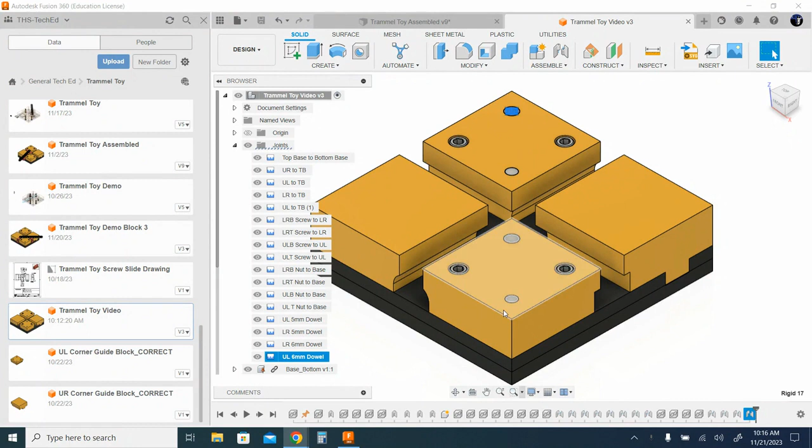So far, what we have done is we've taken parts, brought them in, and jointed them using the joint tool, where we connected the bottom base to the top base. We have done the four corners as as-built joints because when these things were designed in Fusion, they were actually designed in place, so all we had to do was an as-built joint. We have done regular joints with the four bolts and the two different dowels, the 6 millimeter and the 5 millimeter, and for the four nuts on the bottom. So at this point, all of our joints have been rigid, whether regular joints or as-built joints.

What we're now going to do is move into motion joints. As you can see, all my joints here are named, so I'm nice and happy about that.

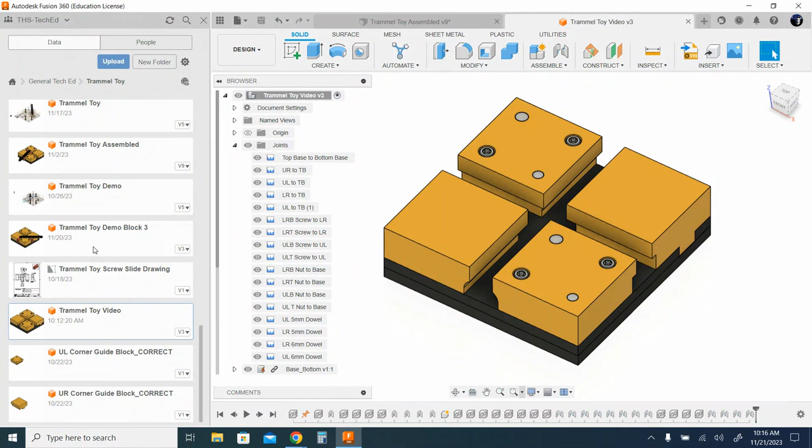Let's go ahead and bring in our pieces. I want you to bring in the pin slide block corrected, I believe that's what I named the file. So there's my pin slide block. My pin one has the rounded corners. I'm going to say okay.

I'm happy with that, and I need you to bring in the screw slide block. So I'm just going to drag that in, and you're going to want to put them on top of each other. Just go ahead and move the second one out of the way and say okay.

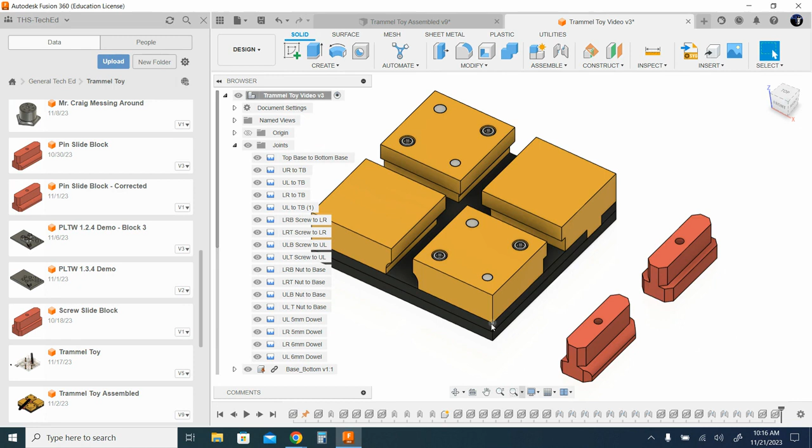The other thing I'm going to do at this point, to save myself a little bit of time later, is bring in some of the hardware, so I don't have to pause again for that. Let's minimize these joints and put our focus on hardware.

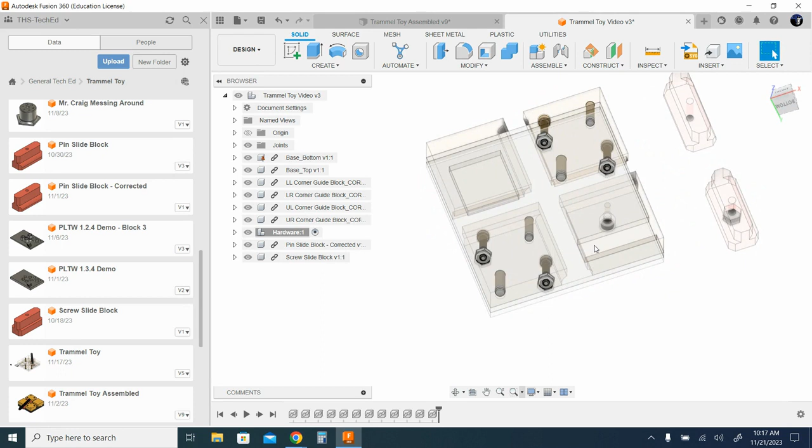I need to have another nut for the screw slide one, so I'm going to orbit around to the bottom here. Press M for move, like we did before. I'm moving a component. I'm going to get one of these nuts, create copy, and let's just move this thing out of the way. Okay, so I now have an extra nut.

Remember that we're doing the move copy as opposed to dragging a new one in, so that when we do our schedules or our list of components, we just add the number to it. We don't have a whole new line in our list with these huge lists.

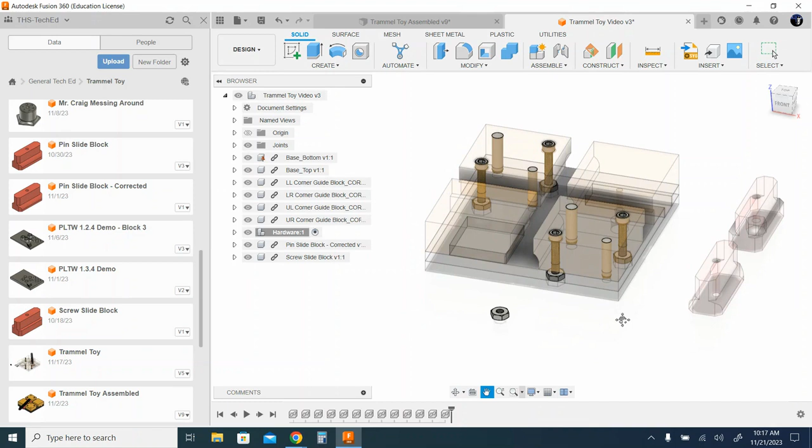So I'm going to need another one of those, another one of these bolts. I'm going to press M again for move, see if I get one of these bolts here. There we go. Create copy, let's bring this one down, and say okay.

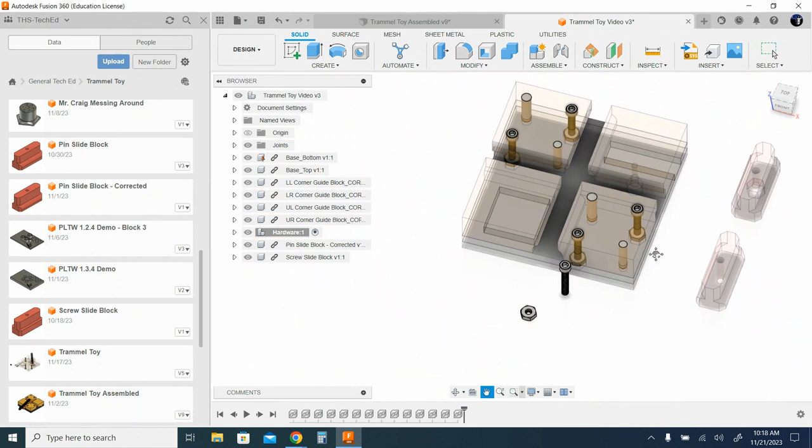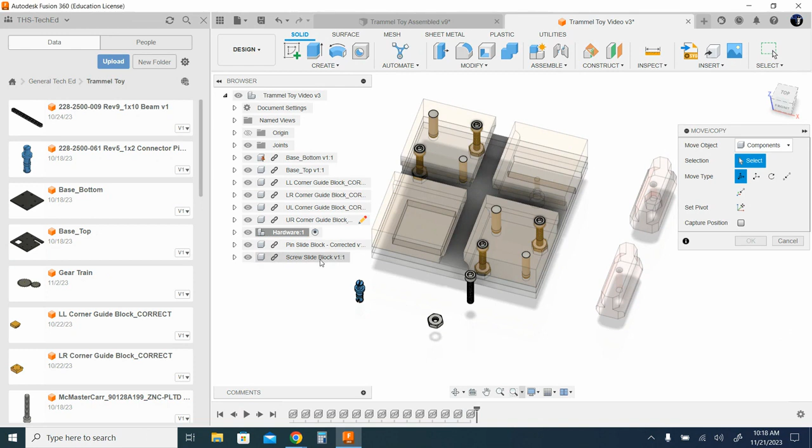I am going to need, while I'm in here, two of these little pins, these connector pins. So I'll bring the first one in and get it out of the way for a little bit here. Say okay. M for move or copy, select that component, create copy, move it out of the way. Perfect.

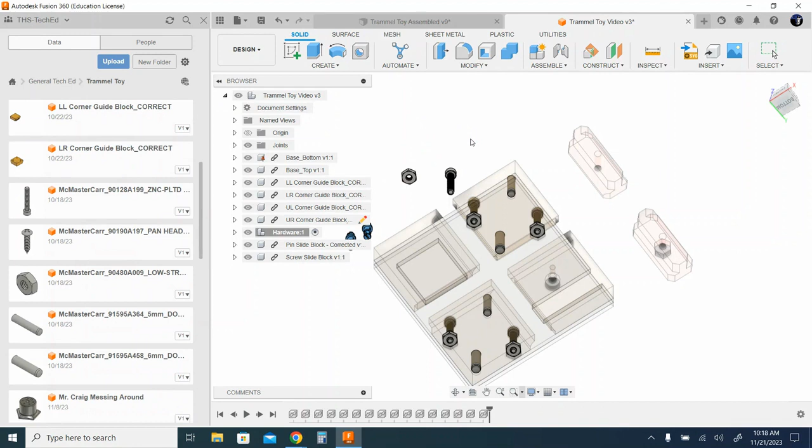And I am going to need the screw for the bottom here, that little bottom hole, so that is right here, the pan head screw. And put that off to the side, let's move it out just a little bit more. There we go. All right, so all of my hardware is in.

Let's get to finishing this assembly. I'm going to put my focus back on the Trammel toy, and I'm going to first create the joint to the screw slide slider here, because the piece is nice and out, I can see things. It'll make my life much easier.

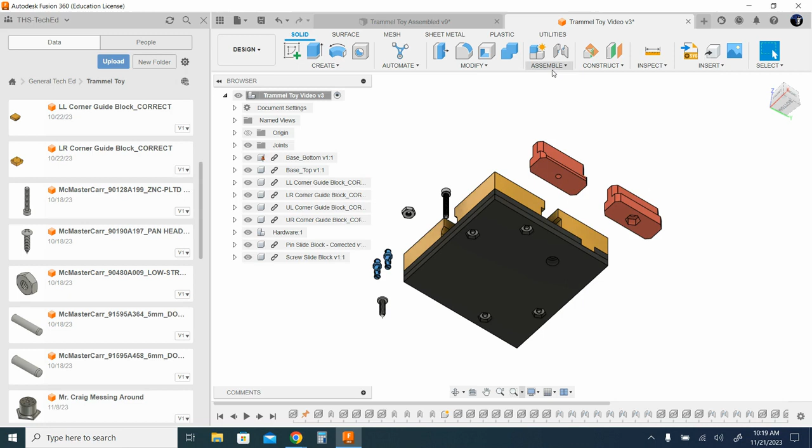So I'm going to do J for joint, or again you can come up to the ribbon, use the one that looks like a hinge, or drop down for assemble, and right there again, joint. It says joint, has the J shortcut for me. Very good. Let's go ahead and get the face of this nut.

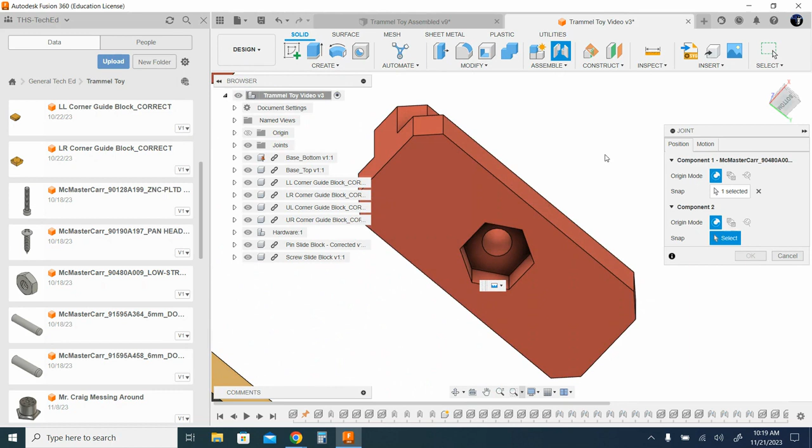Hold down Control, get that center dot. We're going to come down to the counter bore of the slider, hold down Control, get the center spot. And then we're going to twist this thing into place. That looks about right, say OK. Go name that joint. This is nut to screw slider. Very good.

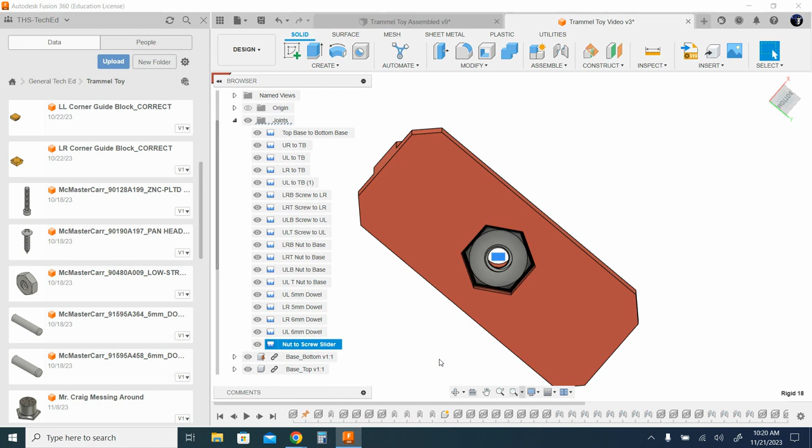All right, now let's go ahead and put these sliders in place. You're going to see that one of the sliders has rounded corners to it. That's going to fit in this spot here.

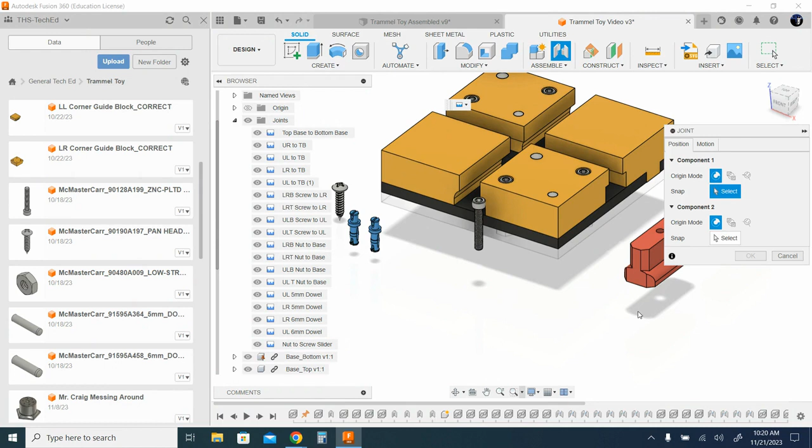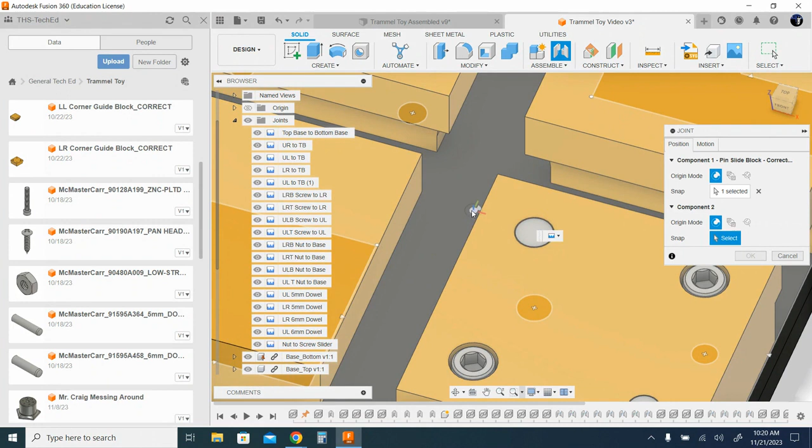So I'm going to do my J for joint just like I've done before. I'm going to get the bottom face of my pin slider, hold down Control, get to that bottom hole, and get to the top face of this plate. And I want the center of that, so hold down Control, hit that pin, or the point.

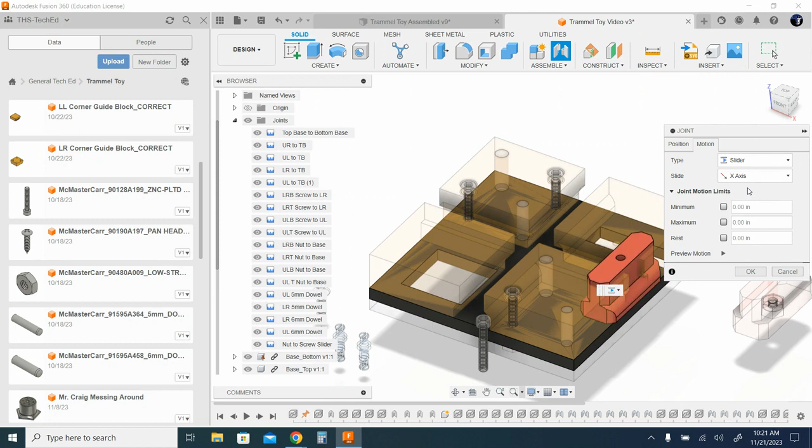We now have that rigid joint, but I want this to be a motion joint. So I'll come here to motion and change my rigid to slider. It's sliding, but right now it's going up and down, so it's on the wrong axis. Let's go through and find the axis that works. That one doesn't work because it's going through the part. Let's spin this thing. There we go, now we're sliding right through.

Do not at this point change these offsets. There's a reason for that, we'll get to it when we get to the revolute. So I'll say okay, and you'll notice if I slide this thing, it only goes the direction I'm allowing it to. I'll move that out of the way and go do my next one after I name it.

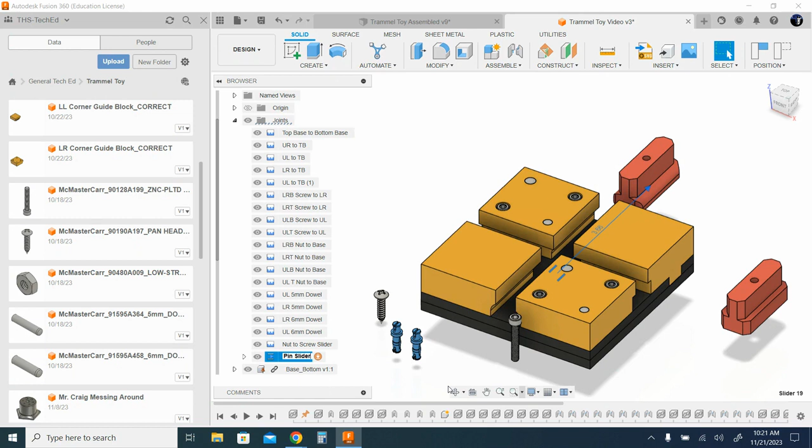Slider, this is my pin slider. Cool, happy with that. J for joint again. Let's get to the bottom of the screw slider. Get on that face, hold down Control, hit that point.

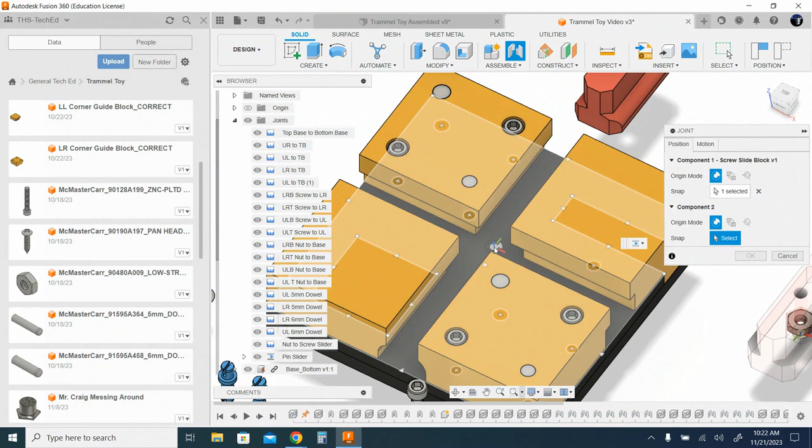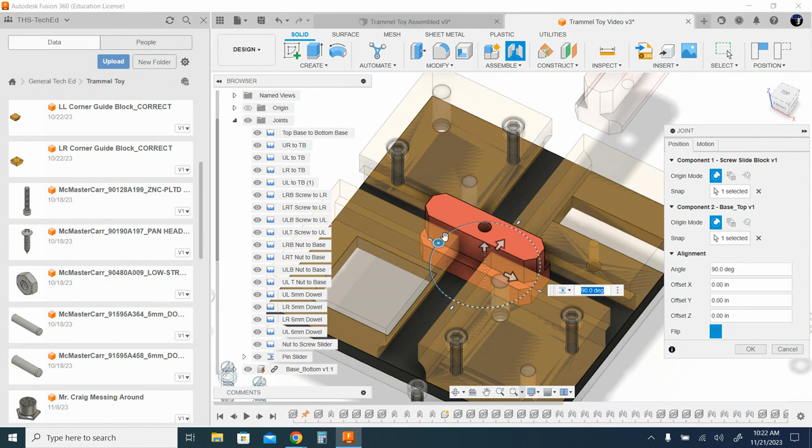Let's get to this face here. Hold down Control, hit that point. Same spot, bottom face of the screw slider to the top face of the top base. You see this thing's going the wrong direction, so I'm just going to use my revolve tool. It's sitting right there, that blue dot. Turn this thing and check my motion.

Z was not right. Let's try Y. Nope, Y is not right for me. Do X. And really, the X, Y, and Z, yours may not match mine - it really depends on the way your model is oriented. So I'll say okay, and this one's now sliding.

So I'm happy, we now have slider joints. Let's go ahead and name that. This is my screw slider joint. I'm happy with that. Bring in our beam so we can do our revolutes. Put a couple more rigid joints in and we're done.

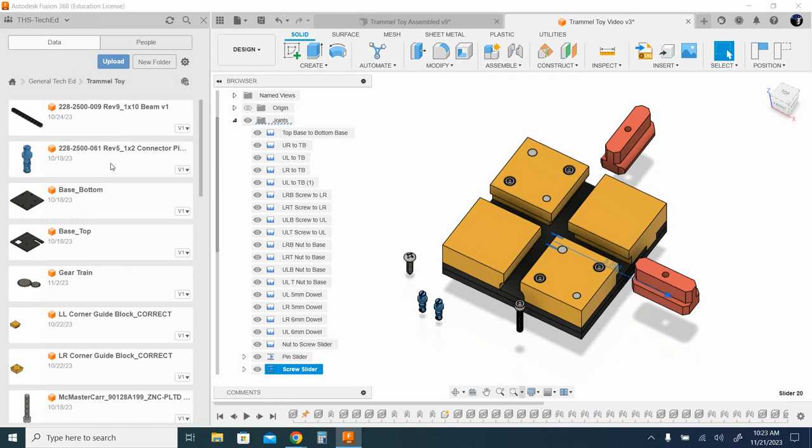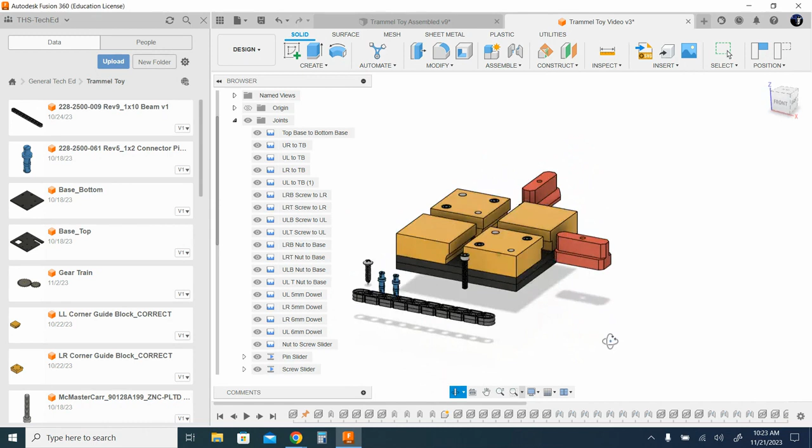So I'm going to bring my beam in. Move this thing out of the way a little bit so I can work with it. And say okay. Very good. So I'm going to go ahead and do the end to my screw slider.

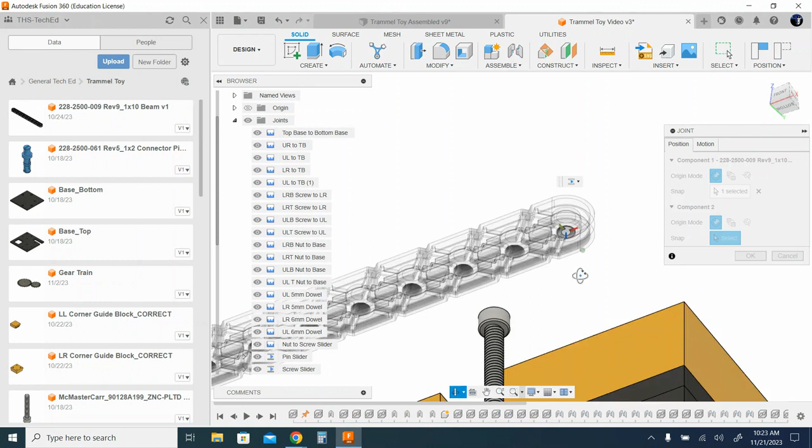That's not what I want. I want this to be a revolute joint. I want it to spin. So I'll come to motion, change it from slider to revolute, and there it spins.

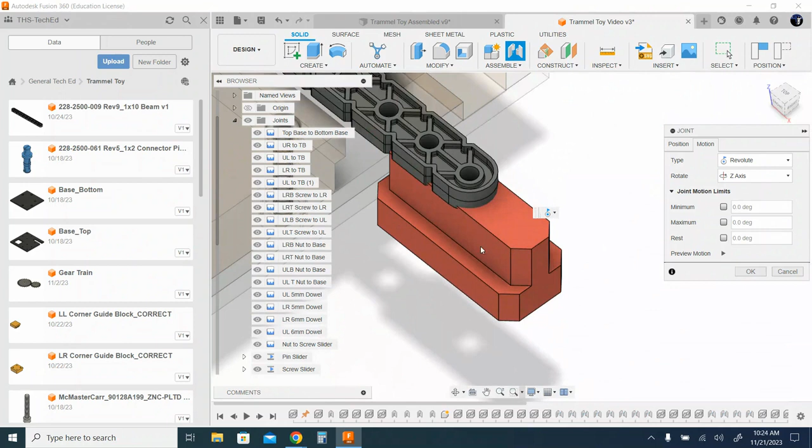The other weird thing, though, is it's putting it right here in my piece because of where I chose the joints to be from. So we're just going to make this thing move up a little bit. Come back to Position tab, click this up arrow, and I'm going to change mine to 0.05. That's going to give me just a little bit of gap. I'm happy with that, there it is.

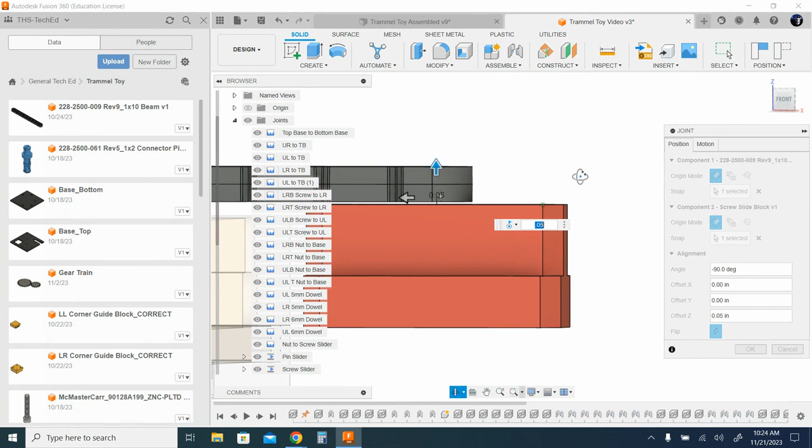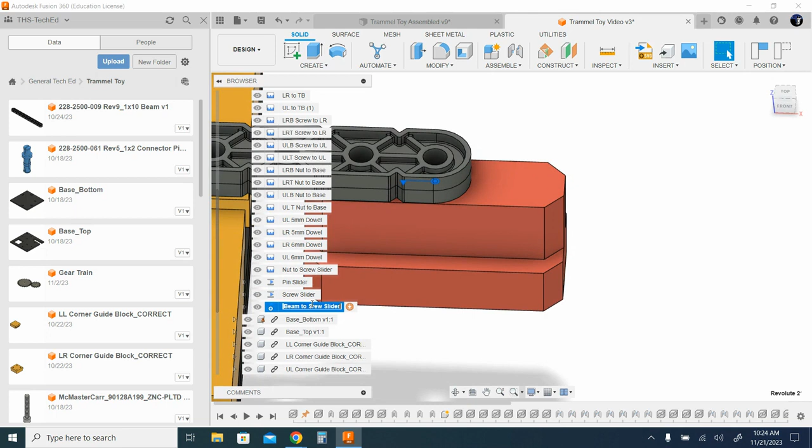And say OK. I'm going to name this my beam to screw slider. Helps if I spell it right. And then if I zoom out, I can show you this thing working. That revolute, you see it turning, and you see the slider moving.

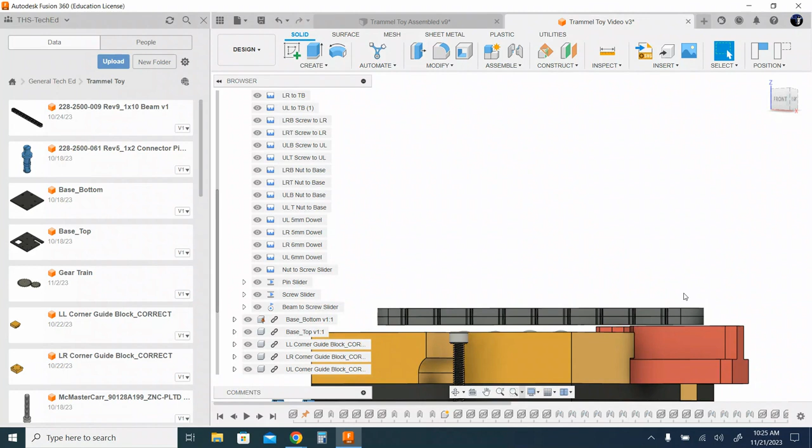While I have this here, let's go ahead and put that screw in. Right now, even though it's there and the revolute joint is working, in reality it wouldn't because there's nothing holding it together. So let's go ahead and get that done real quick.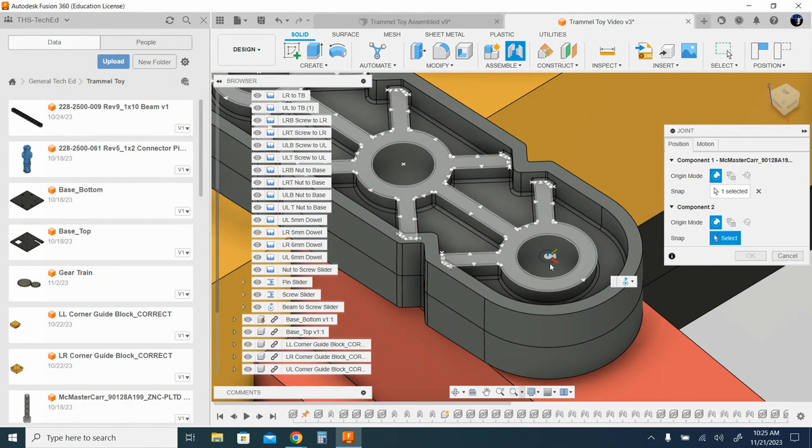I don't need this thing to spin, so I'll change my motion to rigid. There we go, and now this thing moves around, stuff like that.

I'm happy. Next thing we're going to do is put one of these pins in place. Oh, I need to name that joint. So this is screw to beam. There we go. All right, 3 more joints and we are done.

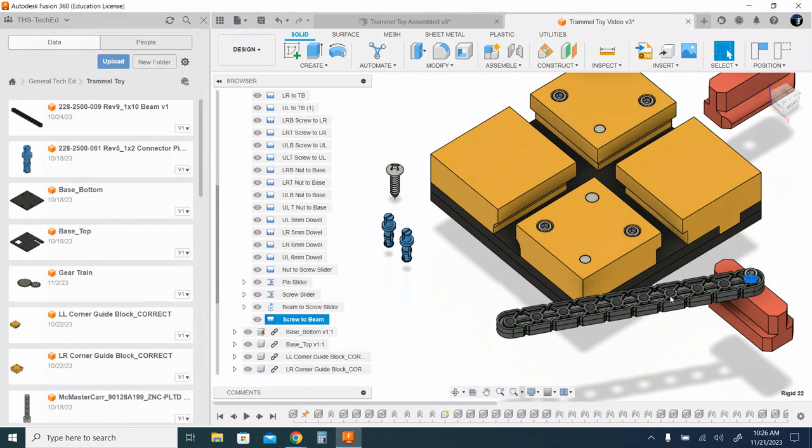So here we go, let's grab this pin here. All right, no, sorry, 4 more joints. We need to put the revolute joint to the pin slider. So J for joint, I'm going to go from the underside. The first pin is going into my screw, so I'm going to leave 3 open holes just to have some space. Go to this 4th open hole, get on the network, control, center spot.

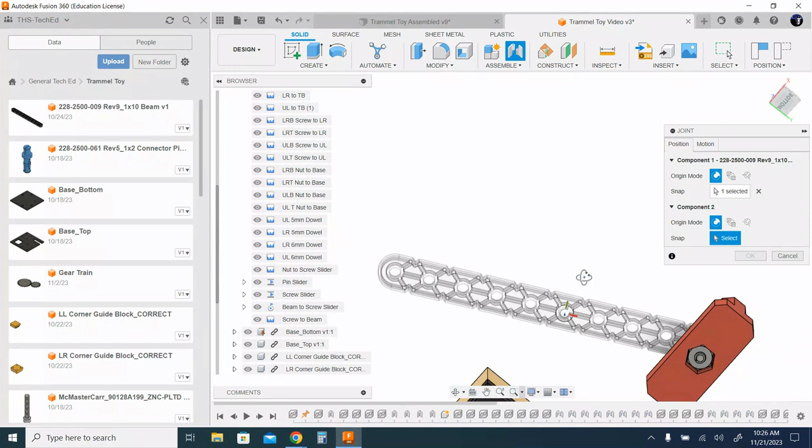Move over to my pin slider, top plane, control, get on the center spot. Motion again is revolute, and yes, it's giving me a warning down there. I'm expecting that because I need to go back to my position and get these things to the same height.

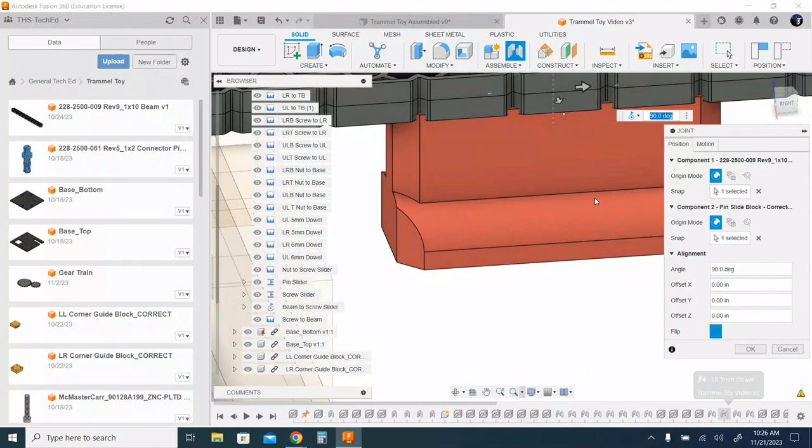Very important about Fusion: you have to be accurate when you do multiple revolutes on the exact same plane. They have to be accurate up to 16 decimal places, but Fusion only lets you enter accuracy to 8. So how you get to 16 is, for instance, with these pieces here, I would design the cross section before filleting, use two files, and work off the same height. If you're working inside the same file, use offset planes and extrude to an offset plane. If anything changes, they'll always be the exact same height all the way out to 16.

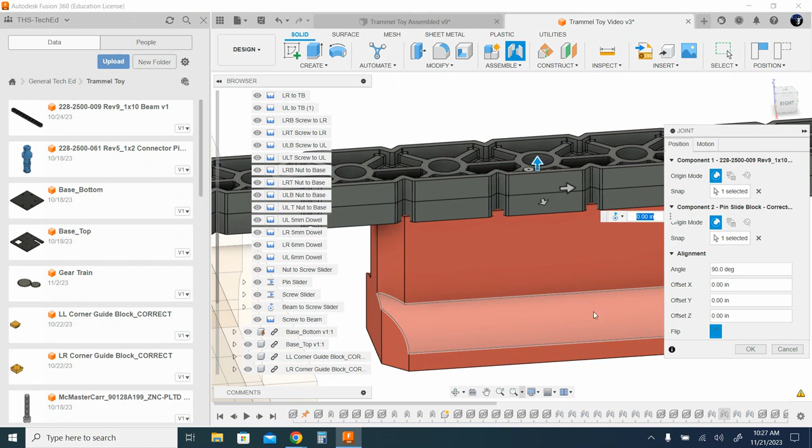All right, so this thing, I need to make this 0.05. Now let's zoom out. They are locked together with a little bit of magic spit, and there we go. Let's put our pin in so this thing looks correct.

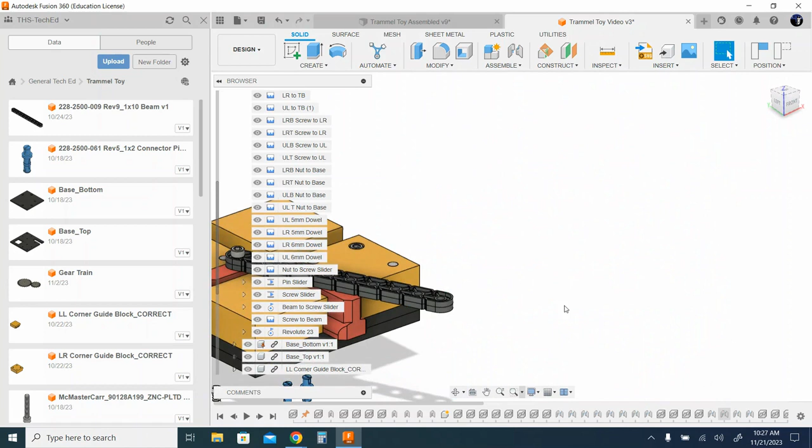Let's actually first name this thing real quick: beam to pin slider. There you go. There we are, joints are all named. We're going to do a J for joint.

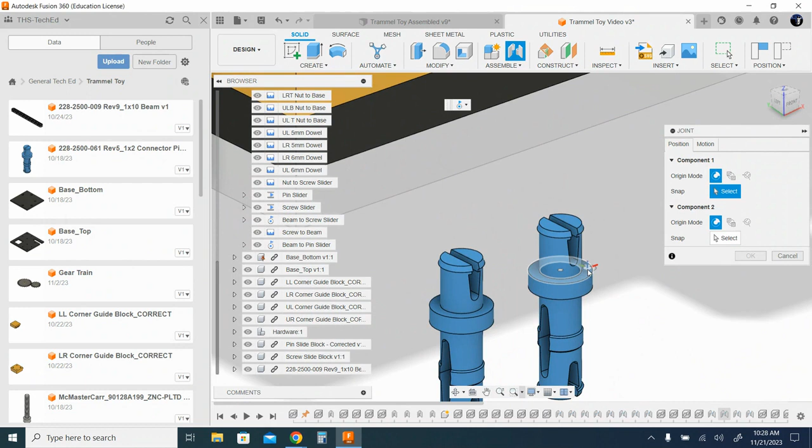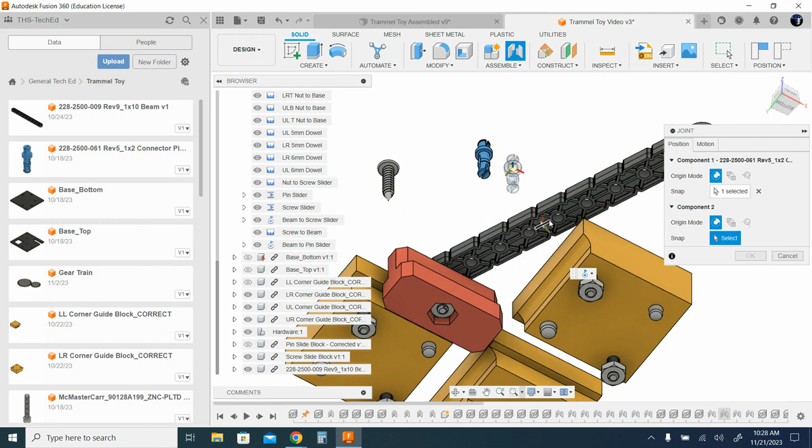Grab the short side of this pin. I'm going to get that face, hold down control, get the center spot, and let's hide some of this other stuff so I can see what I'm doing. And the pin slider, there we go. I want this thing to go three empty holes right here. Put it right on the network here, hold down control to that center spot. It's going to move it in place. My motion for this thing is rigid, it's not moving. Say OK. And make these things visible again.

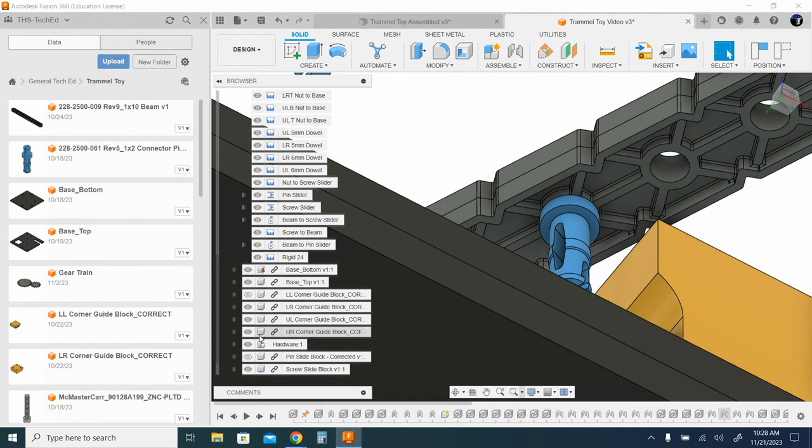There it is. Hit the home—yep, that's exactly where I want it. Let's name that: this is my pin to beam joint. So that joint's now named.

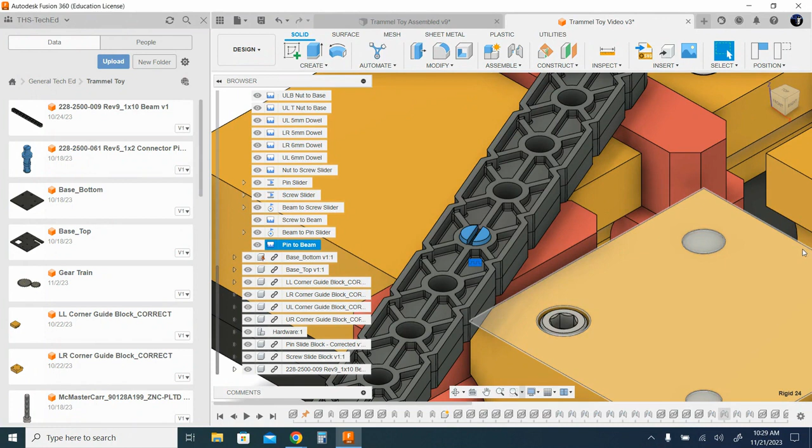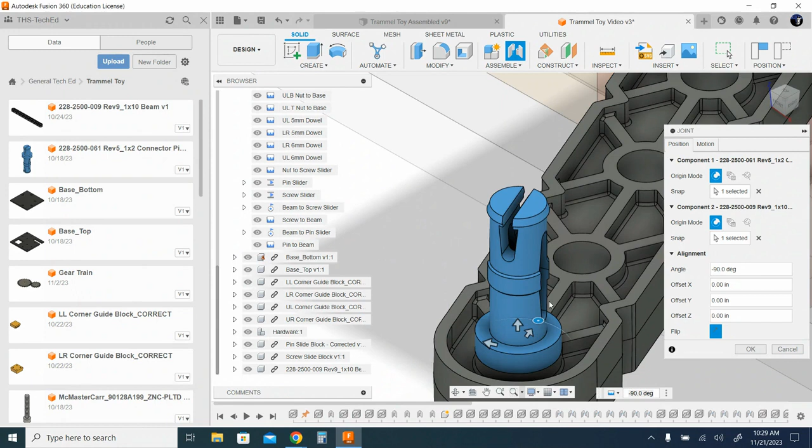Last two. This last pin, J for joint. Grab the short side face there, hold down control, get the point. Come out to my end—this is going to give us a nice little handle. Control, go to that face right there. It's going to spin it around because of the direction I chose these things, the orientation when I chose them. I'm happy with that. Say OK.

Name this thing: this is my pin handle. I think I misspelled handle. Oh my gosh. No, I had it right—one of those mornings. Okay.

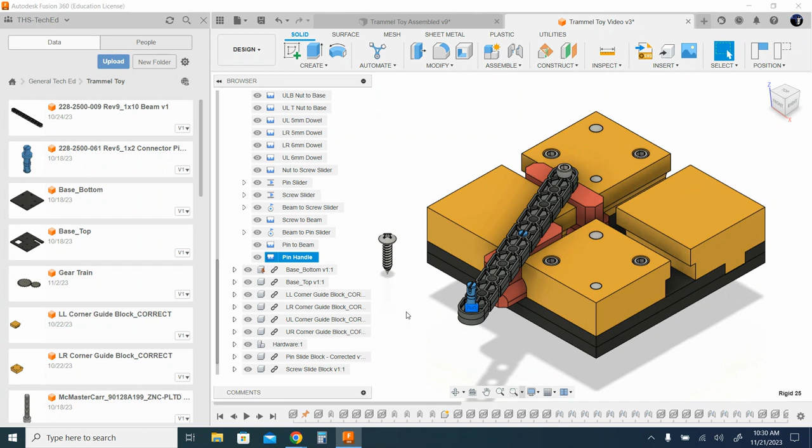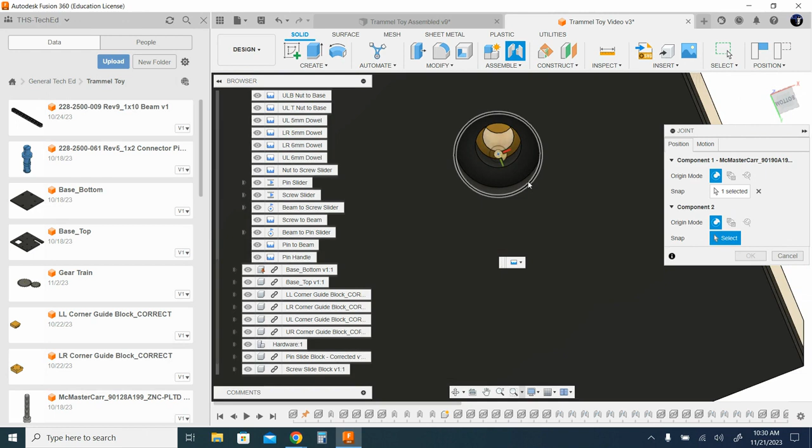And then let's get this screw in place. J for joint. Underside of this, we're going to get the bottom of the head. Control, get that center spot. Go find that circle counterbore here. Get to the underside, control, hit that center point—it's going to spin it around for me. Put it in place, say okay, and name this thing. Let's go ahead and name it bottom screw.

All right, at this point we are completely assembled and jointed. If you want to see this thing work, go find that joint right there, which was our screw revolute—so right there, beam to screw slider. This is a nice thing about naming these: we can easily find them, animate joint relationships, and you will see your Trammel toy move.

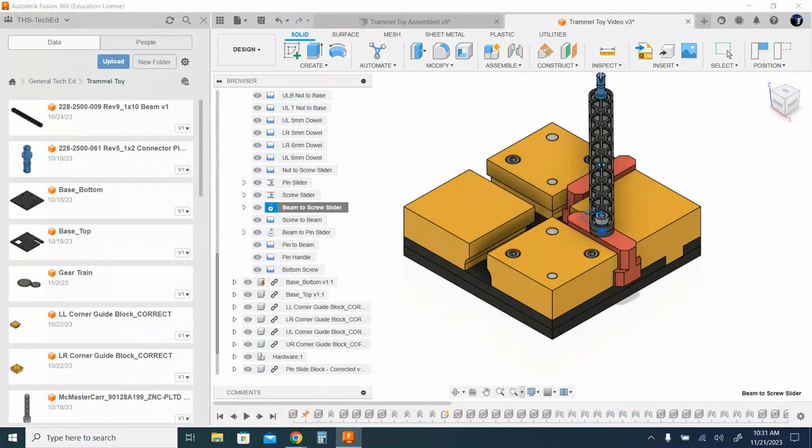So what have we done in these two videos? We brought in a bunch of pieces, linked them in from external files. We did joints—that was the main focus of this thing. We did as-built joints for pieces that were built where they needed to be, and when we brought them in, we just joined the components together or locked them in place. Remember, you can only joint pieces or components, you cannot joint bodies. So we jointed these things together.

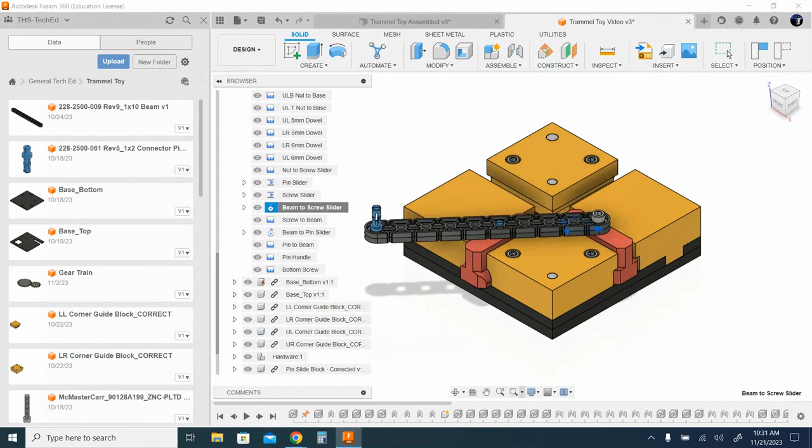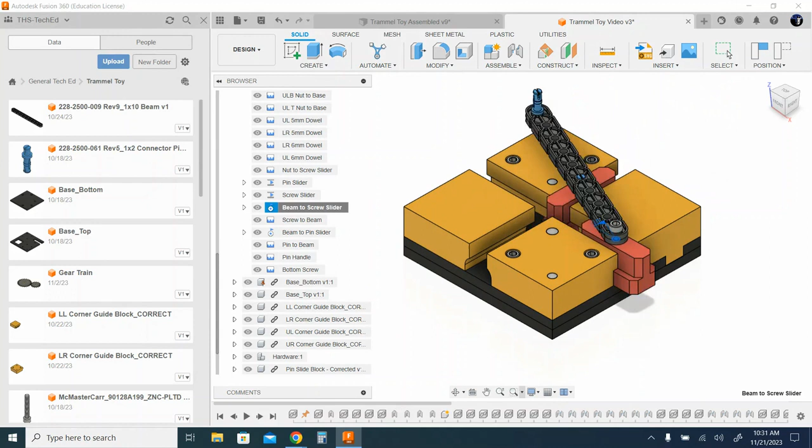We did them as built joints because they were already in their correct locations. We did regular rigid joints for pieces that needed to move from one spot to another—we did that with the four screws, the four nuts, the two 6mm dowels, and the two 5mm dowels. We did them also for the screws and for the pins. We did two slider joints between the two slider pieces and the top planes, ending up twisting one so it was in the right spot using the revolve tool. And we did revolute joints between matching planes with the beams to the top of the sliders. So you all have done a decent amount of joining with this thing.

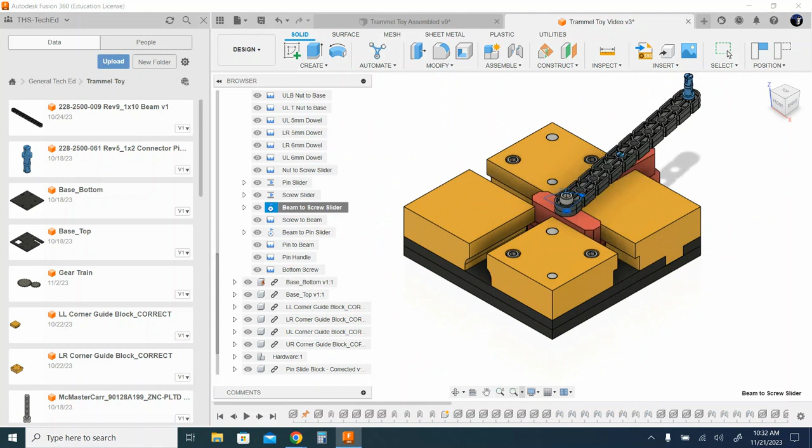If you have any questions, please let me know. But at this point, we have completed Archimedes' Do Nothing Trammel toy.